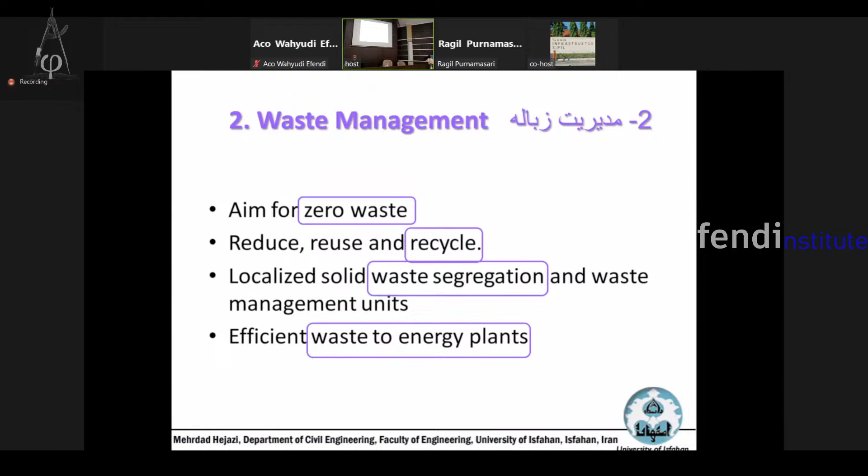Also, in a smart city, you have a smart transportation system, such as battery operated cars, mostly not petrol, and sometimes they are solar powered, using the energy of the sun. Also, you have cycle tracks, meaning most people use bicycles. Here in Indonesia, many people, as I noticed, use motorcycles, which is good. The next step would be to use battery motorcycles. If you come to Iran, unfortunately, the use of motorcycles is not that much, everybody uses cars, and it's not good at all. If you change it to motorcycle and bicycle use, that would be the best solution.

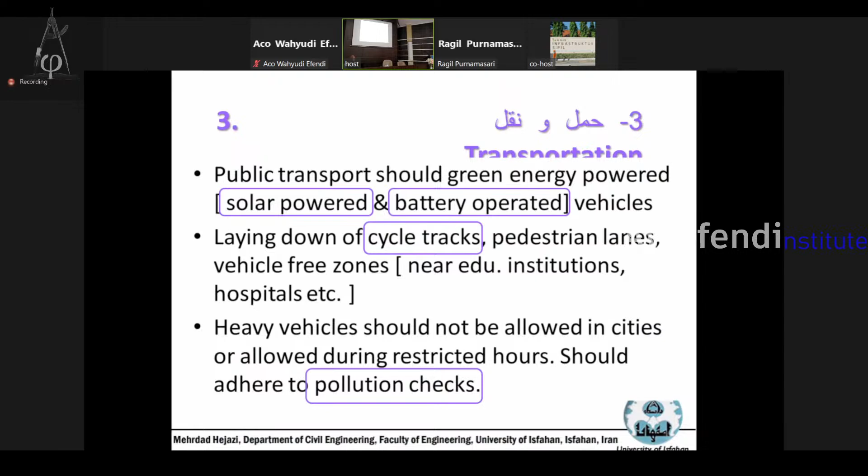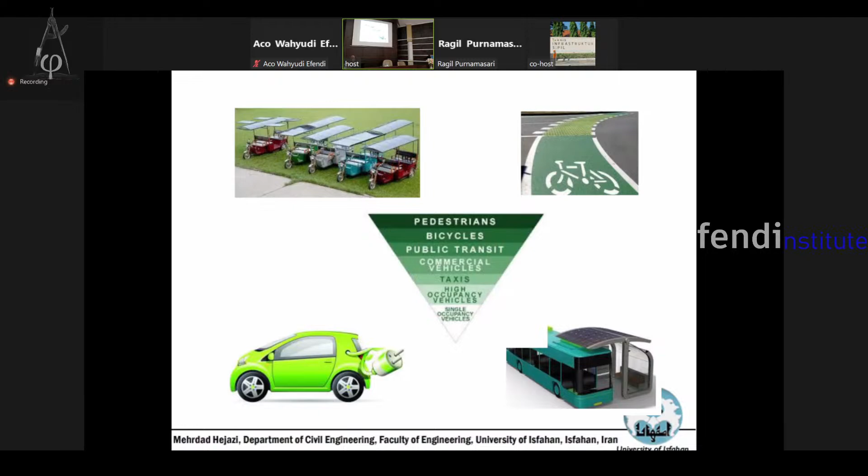In some countries, this triangle is the other way around, which is the worst situation. This is the best situation, that in some European countries, and even in Asia in some countries, you see such a triangle, which is very good.

The other is water management. Water management is important in two types of countries: first, countries with lots of rain, like Indonesia, and countries without much rain, such as Iran. Here, rainwater is very important, even if you have lots of water or little water. The water comes from the sky, and we should use it. Why not keep it?

The other thing is proper waste water treatment. It means if we go to the bathroom, this water could be recycled again and be used. In many countries, in many cities, you have two different water piping systems: one for drinking water, and the other for ordinary use of water. I don't know, in Surabaya, do you have one system or two systems? Two systems, which is very good. But if you come to Isfahan, my city in Iran, we have one system. But if you have two systems, it's a better solution.

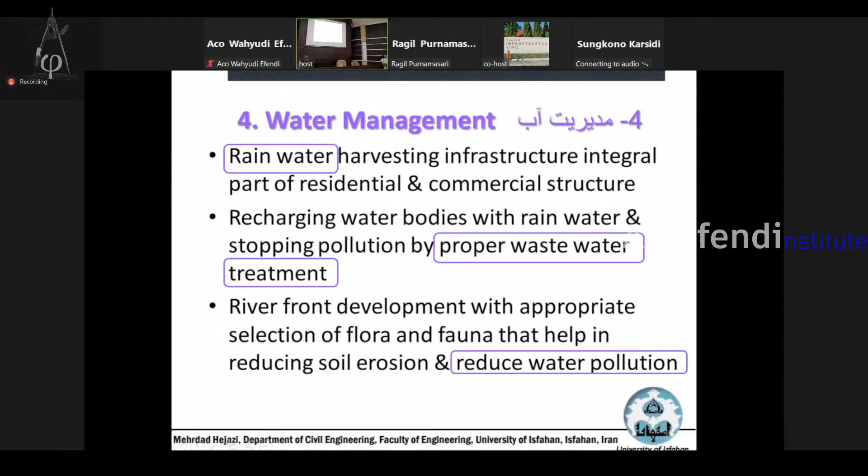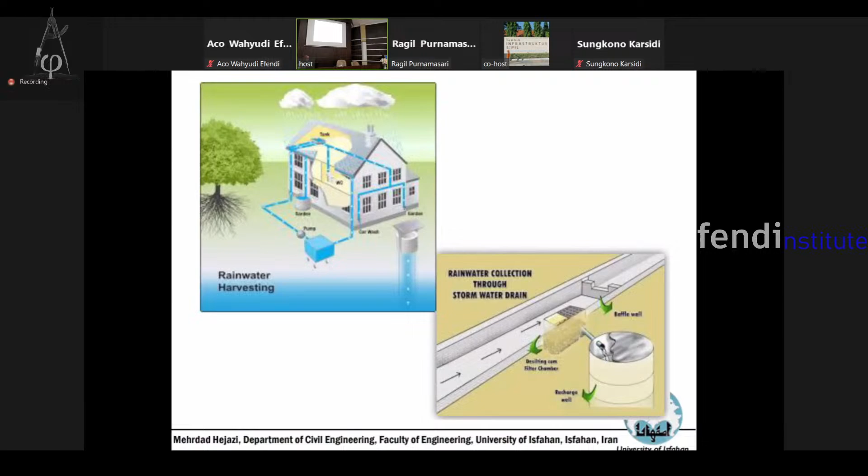Well, as you can see here, if you know this, it may be better than me. If there is rain, you can design your building in such a way that it gathers rainwater. It goes down into a tank, and it could be purified as drinking water, because rain is very good. You can drink it if you purify it quickly, and also you can use it as waste water. This is the system. And if you have so many of these buildings in a country with rain, like here in Indonesia, I think that would be one of the best solutions to keep water, and that's it.

Then we have air quality management. I don't know, do you have air pollution in Surabaya, despite the fact that you have lots of rain?

But imagine if you come to my country, where there is no rain and lots of pollution. In Isfahan, I remember when I was at your age, about 20 or 22 years old, the sky was always blue, there was no pollution, we didn't know what air pollution was. Believe me, the first time I saw air pollution was about 30 years ago. I was on top of a building in the square in Isfahan, and I couldn't see the other side of the square. I didn't know what it was, and they told me it was air pollution. Unfortunately, today, if you come to my city, to Isfahan, most of the days it's a polluted day.

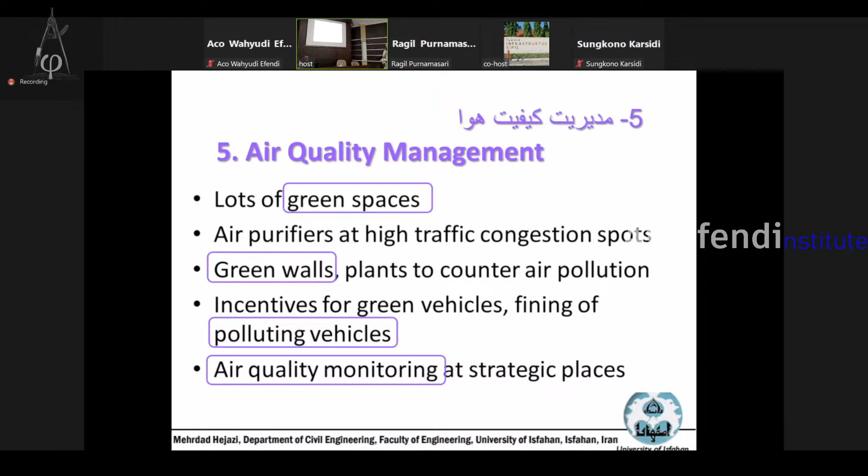You should wait for 1 month to 3 months maybe to have good air quality. Imagine we do not have rain, we just wait for winds to come, and it's only for 1 or 2 days. Therefore, you need to increase green spaces. You need to have green walls, green roofs, and you should have air quality monitoring. I'm sure you have such a system, but maybe we need to increase them.

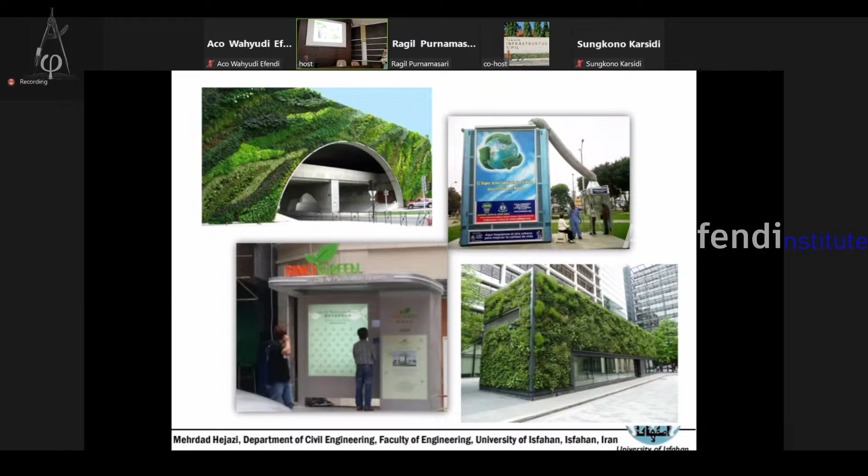Therefore, one good solution is to have such green buildings with green roofs and so on. And then security or safety for the people. You add CCTV cameras, you have a neighborhood watch program, and you have volunteer work that coordinates with law enforcement people.

Well, let's go to a smart city and see what are the materials in a smart city, because construction materials are also very important. I give you some examples. You could have roads whose pavement is made of waste plastic and waste materials. It means that you don't need to use asphalt, you don't need to use oil in order to make your pavement. If you use waste material, that would be a very good solution to the problem.

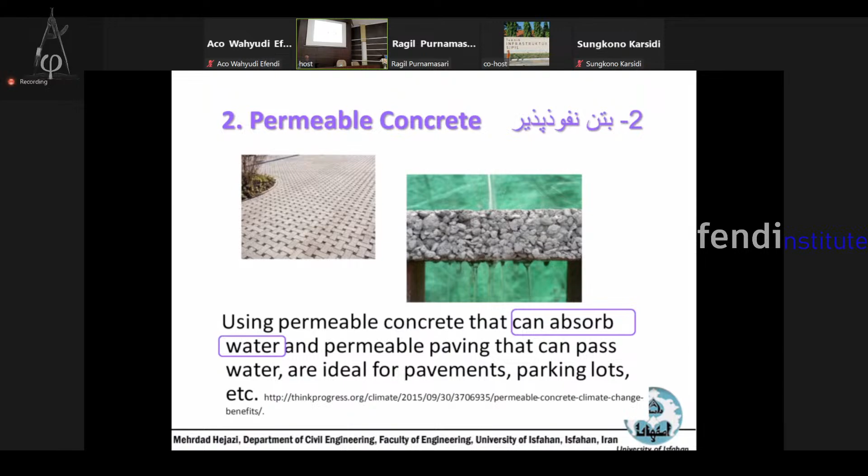Also here, it is permeable concrete. It means that when it is raining here on the ground, the water goes down in a specific location, such as a canal, a diverting canal, and then it conveys water into a tank to keep it. Therefore, in some countries with lots of rain, one of the best ways is to make permeable concrete or permeable pavement in order to absorb and keep water and use it later on.

Therefore, if I want to conclude or collect what I said, in a smart city everything is smart. Each single building is smart, as I explained, and I will explain later. The streets are smart, the parkings are smart. They are interconnected by a wireless system, and somebody in the municipality building or buildings monitors everything in order to make sure that everything is working. And imagine if you have such smart cities, you can save lots of energy. And when you save energy, you use less energy, there is less pollution, less hectic situations for the people, and people can live more easily and without any stress.

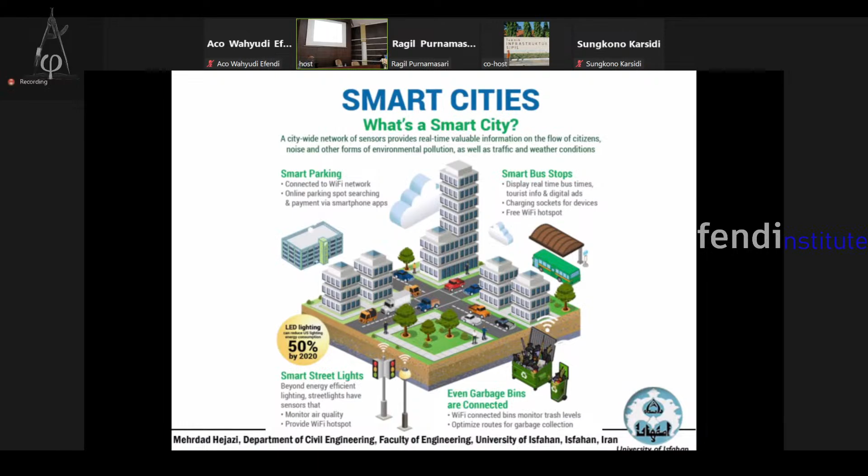Yes, please. Thank you. Now we go to the next section, which is smart building.

I explained about smart city, and also I explained quickly about smart building. Any of the students would like to tell me what are the features of a smart building? I will help you. Who is interested to tell what is a smart building?

Ada yang mau menjawab bagaimana karakteristik smart building menurut teman-teman di sini? Nggak apa-apa kalau nggak yakin, nggak apa-apa dijawab aja. I help you. Don't worry, who would like to contribute? It doesn't matter if it is correct or not. Please, yes, yeah, please.

Yeah, my name is Bayu, and I will explain about the smart building. I think the smart building is a building that has advanced technology and has any characteristic in smart cities, such as zero waste and many more.

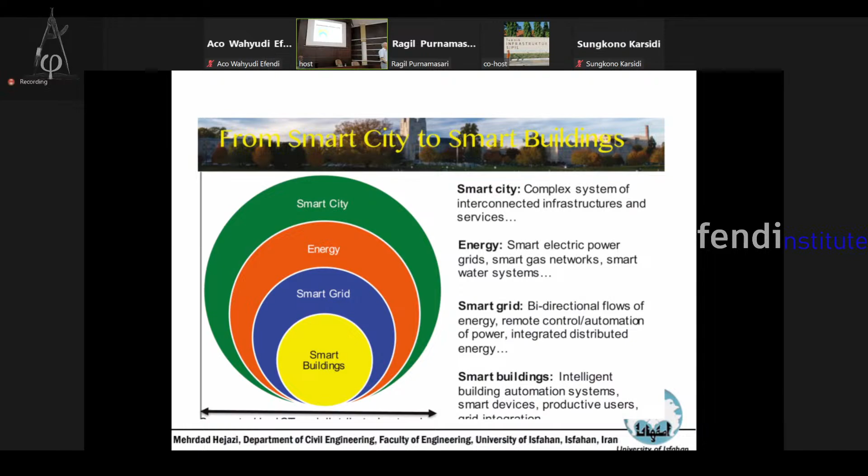Well, if you have a look at this diagram, you have individual buildings. It could be a small house, a large building, a factory, and so on. Inside each of them you have a smart system, and these smart systems are connected to each other by a smart network, which means if there is a main management department, say for example in the municipality, and if something goes wrong here, this management office is responsible to come and resolve the problem. As, for example today, if you have ordinary electricity and it runs off, there is a specific office in the municipality who should come and resolve the problem. Here, you have a smart building.

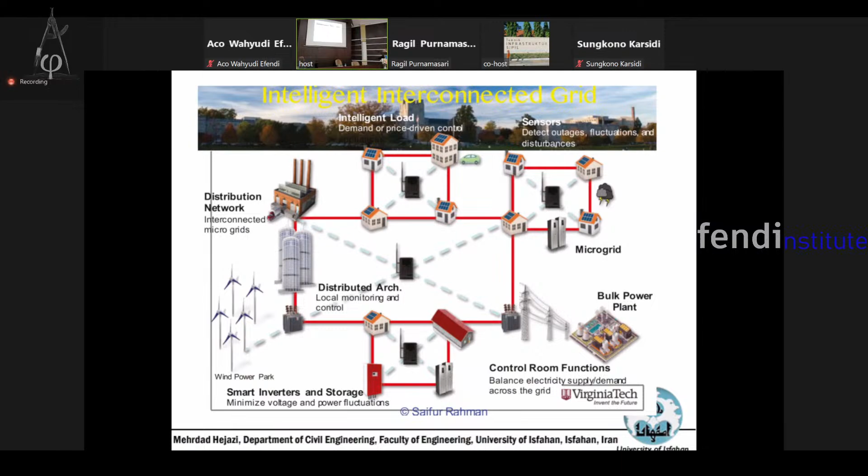They are all connected by Wi-Fi and so on, and if something goes wrong, somebody would come and resolve the problem. There are some elements like here: they are wind power parks, they produce energy. They are solar panels, they produce energy, and they should all work together. It means the whole city or elements are interconnected through a smart grid or a smart network.

Now, what are the features, what are the characteristics of a smart building? First, a smart building has four main elements. The first element is the structure. The second is the systems inside. The third is the services that this system produces for us. And fourth is management, the management of the previous three elements. Therefore, in a smart building you should optimize the operation of these four elements.

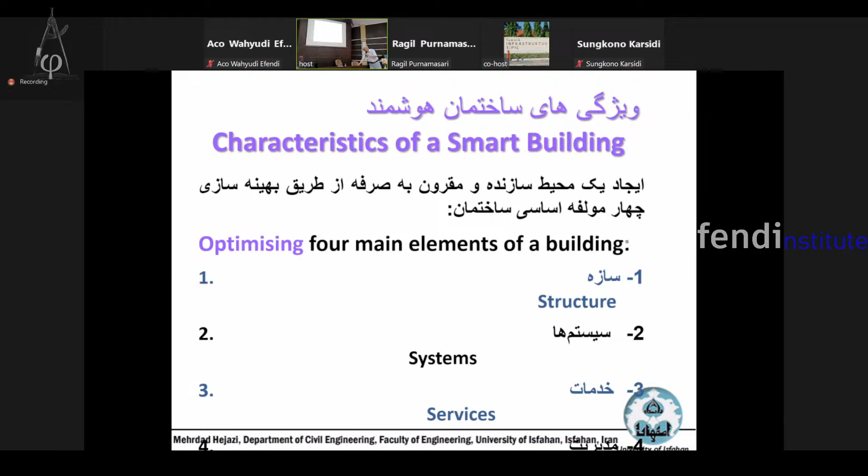It means that if we have mobile phones here, we should optimize our usage of this mobile phone. Otherwise, it is not very functional. I go, well...

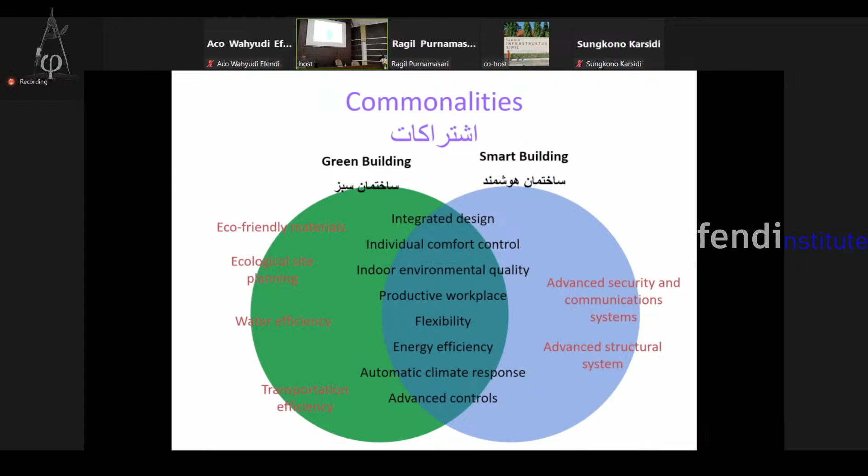It means that at the beginning, maybe you need to pay money for a smart building, but in the long term, you will have savings for your money. And it is not just a matter of money. More important is the nature, the atmosphere, the environment. Everything would benefit from this smart building.

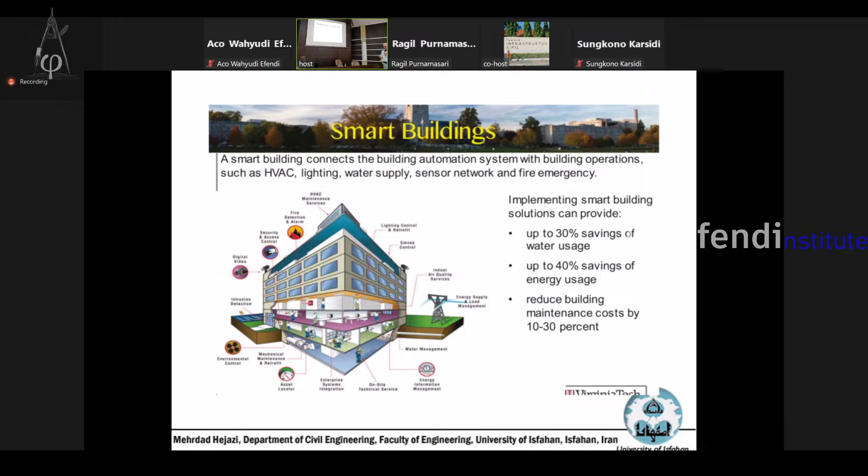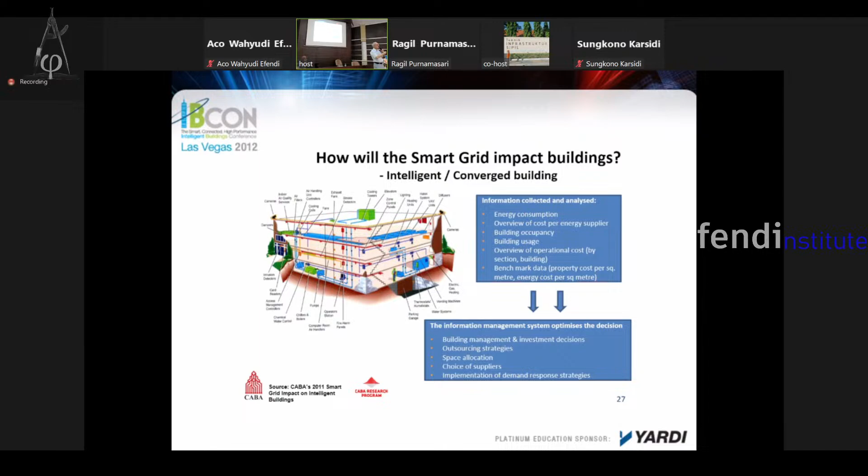If a civil engineer or a construction management engineer like you can do it, we can do it. We need to get some courses to do that. As you can see here.

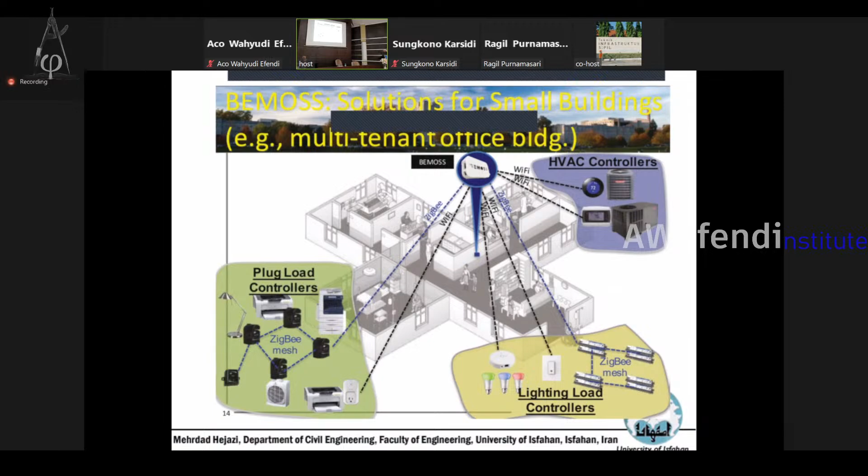Again, you have lighting load controls. For example, if lots of light is on and lots of energy is used here, automatically the main control system will check if such a huge amount of light is necessary in this building, in this room or not. If it is not, it will automatically turn down.

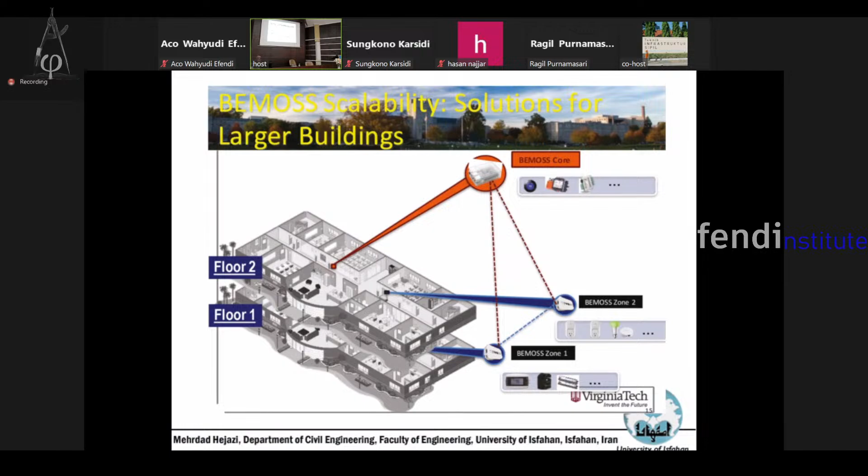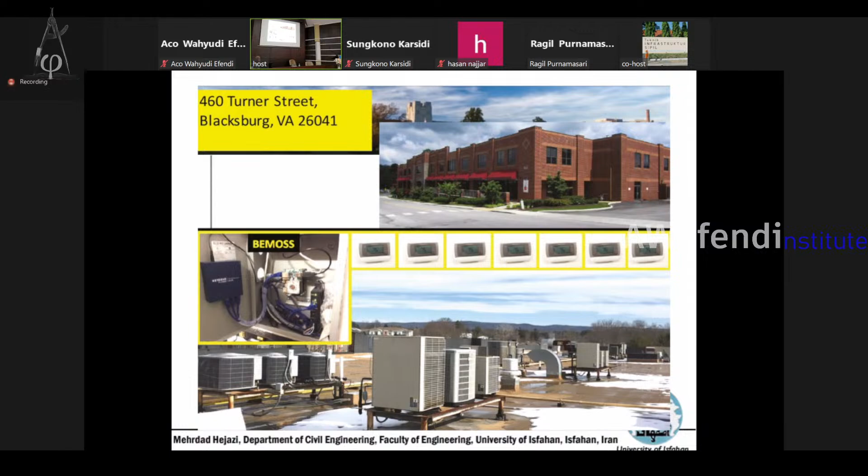Okay. Oh, let me go through. I just pass over this. Well, somebody would like to come in. Okay.

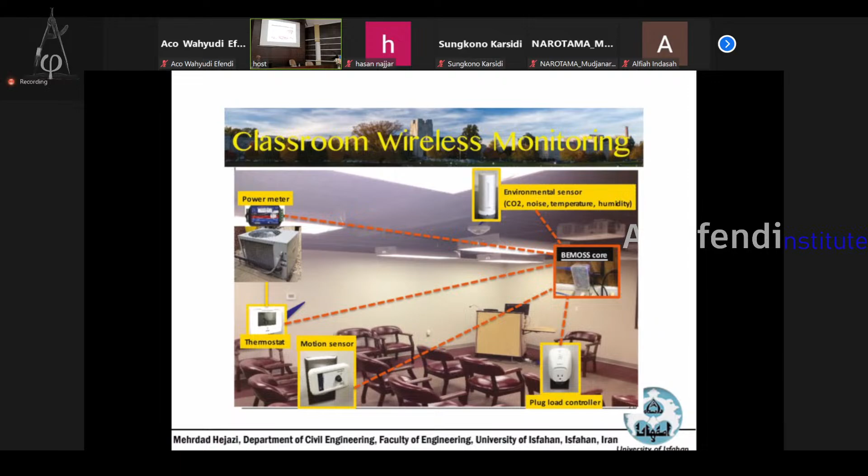Here is the system for controlling a space, a conference room like here. As you can see, there's a thermostat here in order to adjust the temperature, and also there are some sensors, and there are some noise detectors, some temperature detectors, humidity detectors, even CO2 detectors. It means that everything is monitoring at the time, and if something goes wrong, they automatically change it to its optimal function. And as you see here, there is a smart AC control.

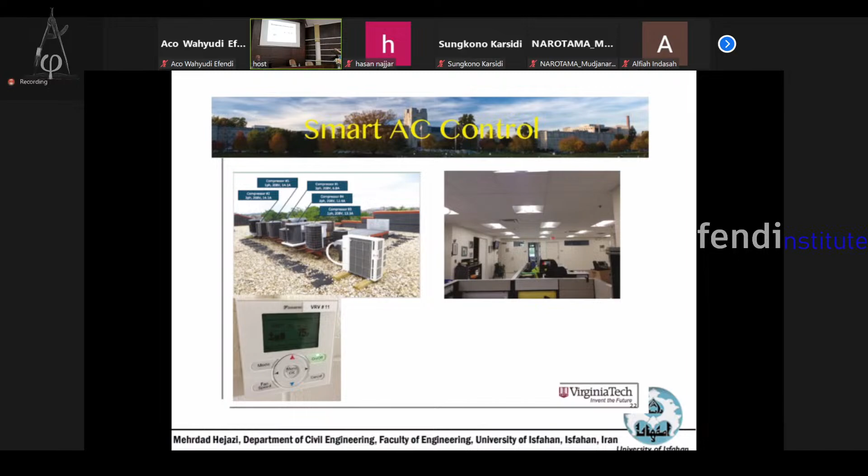It means the atmosphere, the air conditioning system is automatically controlled. It is not just a thermostat to change the temperature, but everything, CO2 and everything would be controlled and changed if necessary. Even there is a center in the building which controls the lighting. It automatically detects if somebody is not here, the lights would be turned off. And when people come in, it would be turned on.

Maybe you have such experience, but everything here is controlled. And there is a central remote control system or control room. Sometimes somebody is sitting there checking everything. Sometimes the computer itself will check everything, and if any adjustment is needed, it would do it.

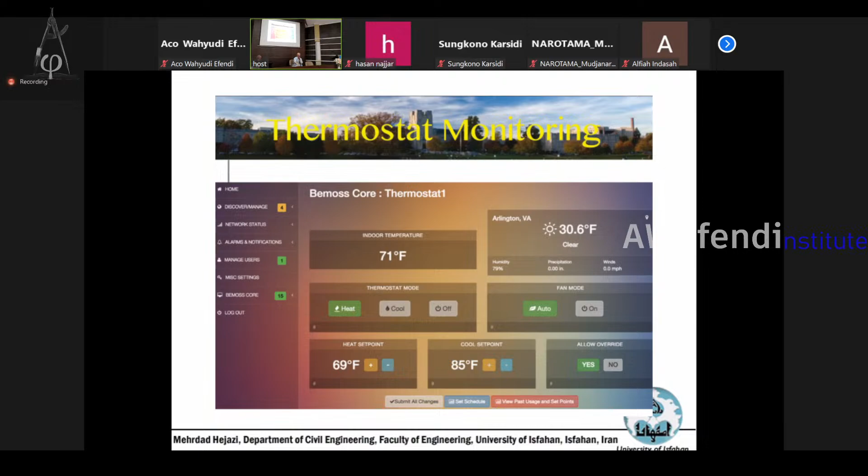Well, let's go to the next section, which is zero energy building. It's a zero energy building we call ZEB.

At the moment, suppose we have a smart building, but it doesn't mean that the energy consumption in this building is zero. Therefore, the first step is to have a smart building, and the next or final step would be how to reduce the energy consumption to zero.

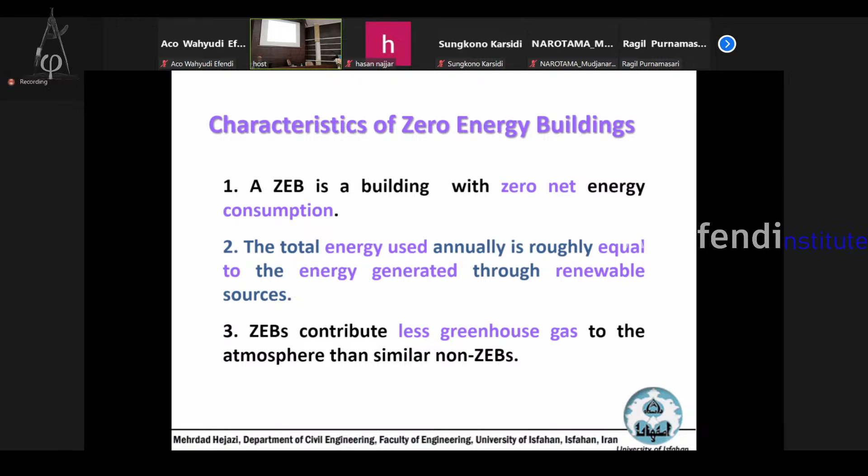Why ZEB? Why use zero energy buildings? First, to overcome the energy crisis. At the moment, in some parts of the world, there is an energy crisis; maybe they cannot produce, or they cannot buy, or something like that.

Number two, to reduce energy consumption. And number three, to protect the environment. It is the main goal, to protect the environment for future generations. We are responsible for next generations. As our parents, our old generations were responsible for us, now we should get the environment and hand it over to the next generation in a better situation. This is the responsibility that we have.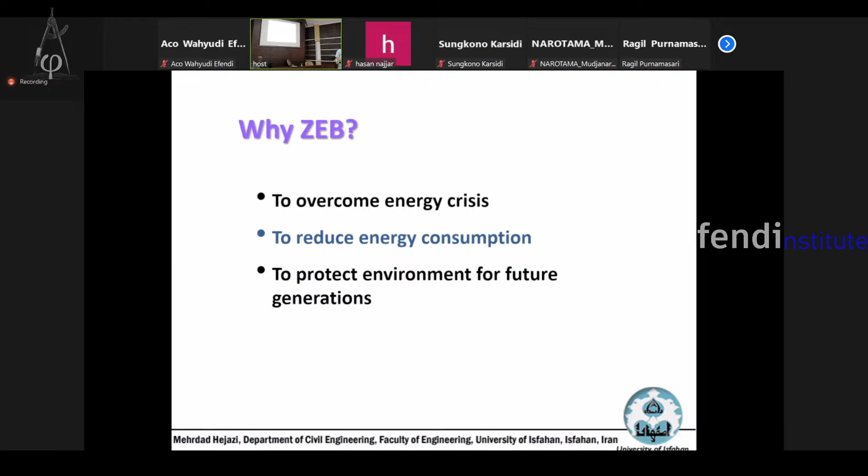How to get a zero energy building? First, we should have appropriate site selection for the building and appropriate orientation of the building. I will explain later. Number two, reduce heating, cooling, and lighting loads of the building.

Through what? Through climate responsive design. It means that we should have a climate responsive design of the instruments or devices, which we call a passive design. Now we should have a passive design of the building. I will explain in the next slide what a passive design is.

And three, to use renewable or high efficiency energy sources. It means that we shouldn't use fuels or electricity produced in plants; we should use renewable ones. I will explain this in the next slides.

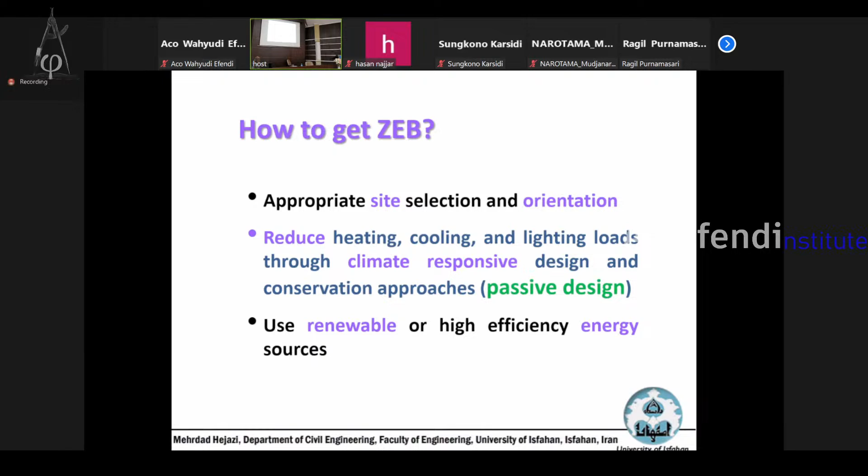Passive design is very important. Imagine we are 1,000 or 2,000 years ago. There is no energy, no electricity, no petrol, no fuel, nothing. What you have for energy is wind, sun, maybe wood you can burn, and so on.

When you have a passive design building, no auxiliary equipment is required to make the system function. It means, as you can see here, you have a cooling system here, a lighting system here, and so on. This means this building is not passive; it is not designed based on passive concepts.

It doesn't matter, everywhere in the world is the same. But we should change our concept. How? In this way: if you choose a good orientation for the building, your building could use sunshine, could use wind, and so on.

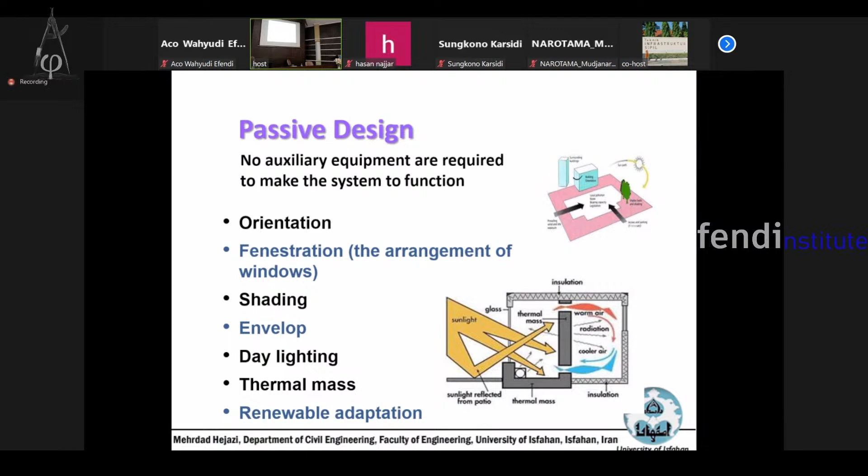You should be able to use daylighting, and also you should have a high thermal mass, I will explain later, in your building. And also every energy consumption should be adaptable; it should be adapted to renewable energy. These are the main features that a passive design should have. I will explain in the next slide.

Your building should be able to catch the sun, or sometimes be prevented from the sun. Your construction should be airtight, meaning no hot or cool air comes or goes outside or inside. You should have good thermal insulation. You should have high efficiency windows and doors, I will explain how, and you should have heat recovery and natural ventilation.

Here in this building, we don't have natural ventilation unless we open two of the doors or windows, one on this side, then we have natural ventilation. We should have solar water heating, which is very important. In order to make water hot or warm, instead of using electricity, it's better to use solar energy. And also you should have efficient air conditioning, which I will explain to you later.

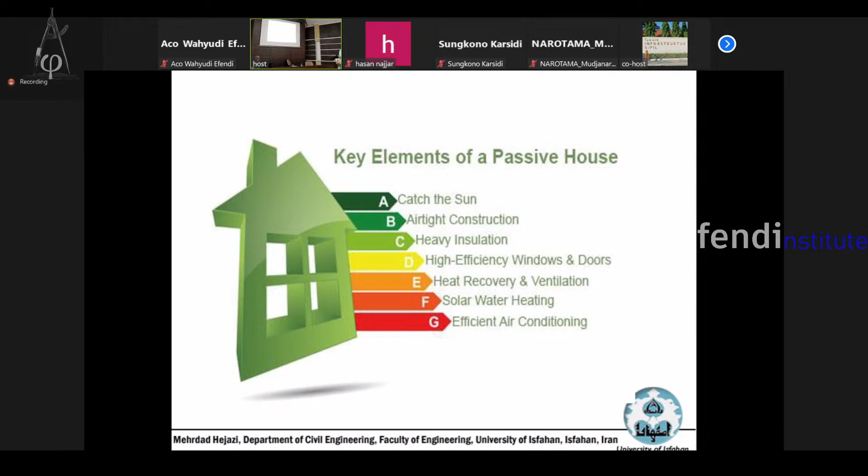Well, if you were 200 years ago, 2,000 years ago, I could give you some explanation. Maybe if we have time, I will show you some examples in different parts of the world that they made passive buildings.

But let's come to the present day, because in present day we are using modern systems, modern materials, modern buildings. There are so many examples in the world. I'll just take you into United States. It is a National Renewable Energy Laboratory, which belongs to the government, and they are working on energy usage of the buildings.

If there is an authority in your country responsible for energy, this organization itself is supposed to have an energy efficient building. For this reason, they design their own buildings in the organization as smart buildings.

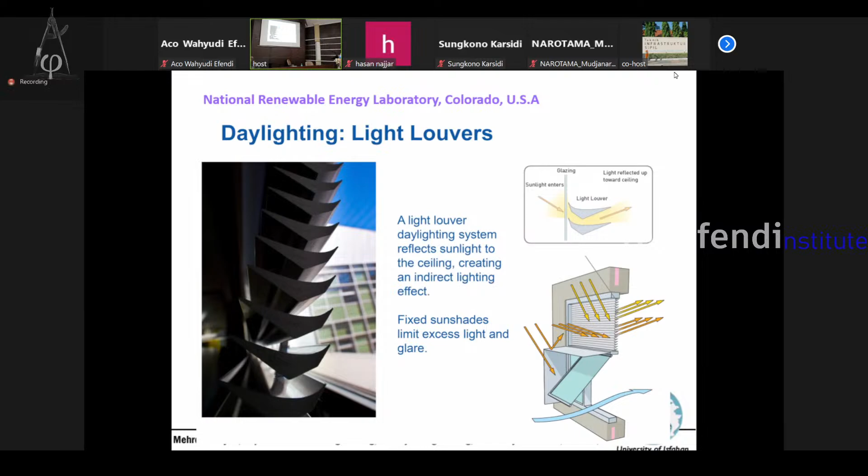Shall I continue? Good. Now, if you have a look inside, it's very bright. As you can see, the light is taken from outside, and here you don't see any artificial lamps, unless during the night. It means that here the energy consumption for lighting is minimized.

Also, here, as you see, the color of the walls is light. As here, they have used white-colored surfaces in order to reflect the light, which is very good.

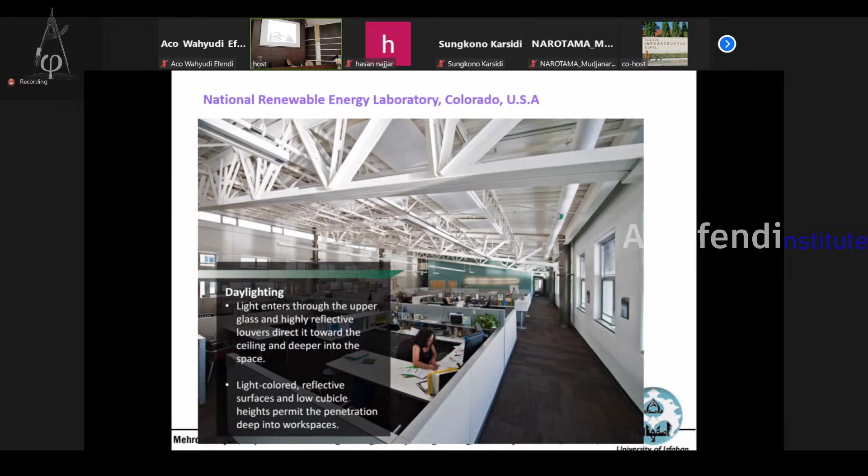Here, as you can see, they have increased thermal mass. When we say thermal mass, it means this: if you have sunshine here and sun comes to this wall, it is a very thick wall sometimes, or it has a wall material with high thermal mass. It means that when it's very warm here in the summer, say 40 degrees centigrade, and sun shines on it, it takes a few hours for the heat to come from this side to inside. And when the heat reaches here, it is already during the night, for example.

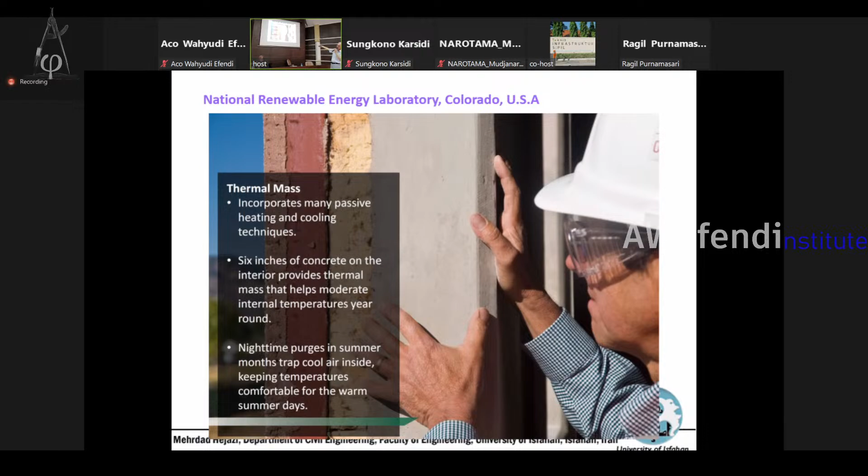And during the night, sometimes inside we need heating, and therefore the heat of the sunlight would be used here. In the opposite situation, in summertime, it may be cool outside, and that coolness is somehow protected inside. Therefore, if you build a wall or roof with high thermal mass, you could save lots of energy.

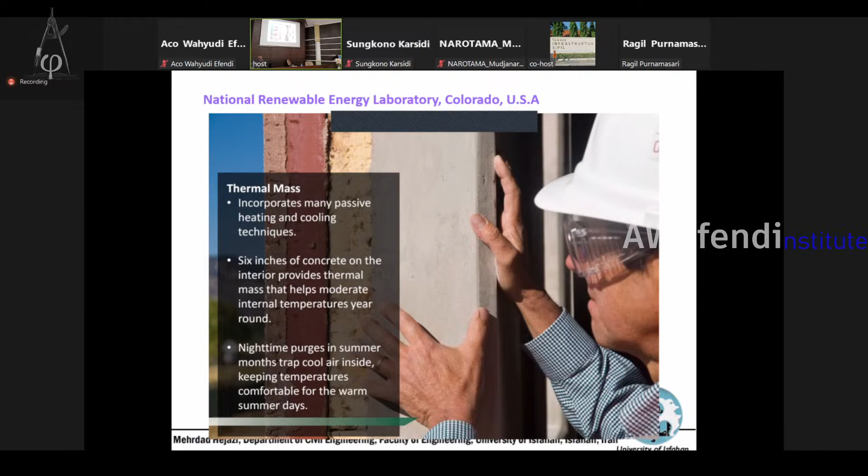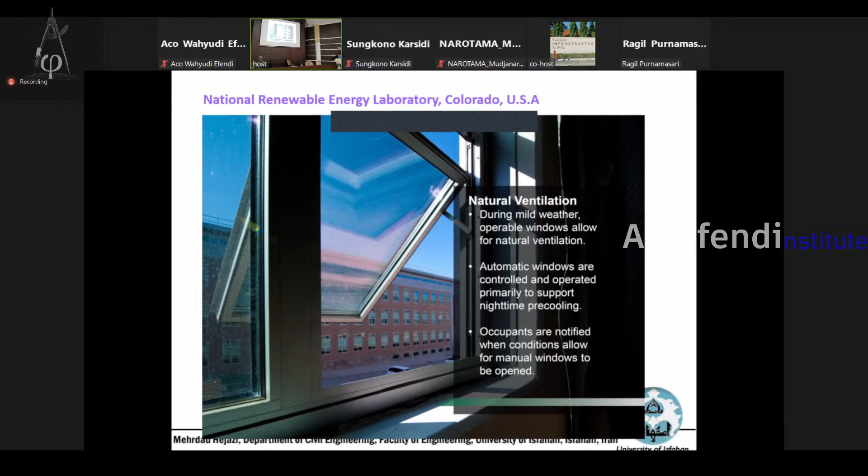Now we go to the fenestration, to the windows. They are smart windows. It means they automatically open or close, and they adjust themselves with the situation, which is the wind speed and the orientation of sunlight. Therefore, you can have natural ventilation with an automatic system.

Here they have used triple glazed windows. Here I see we have some windows with some glasses. I'm not sure, are they single glaze? I guess they are single glaze. Most of them are single glaze, but in general, if you use double glaze or triple glaze windows, that would be very well insulated against thermal transformation. Therefore, using triple, double, or two-pane glazed windows and doors is a good solution for energy saving. Again, this is the situation for the windows that I talked about before.

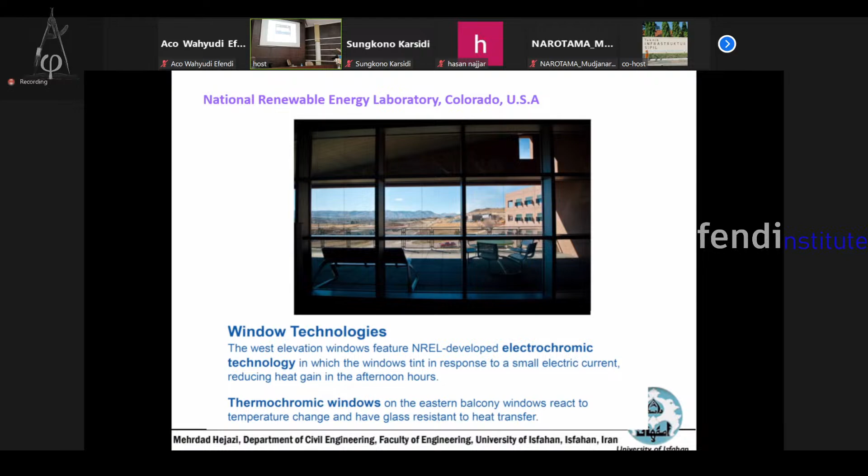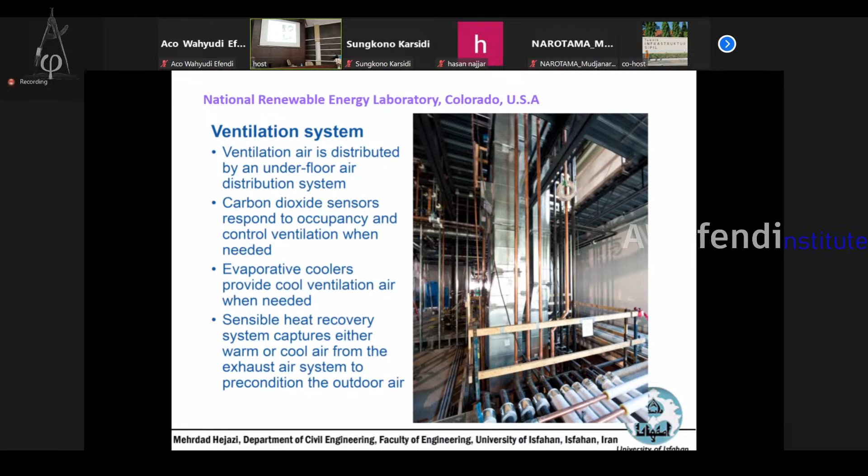It is designed by special engineers, and they try to, even here, as you can see, have carbon dioxide sensors. It means they check the CO2 in every space. If it is more than the maximum which is allowed, somehow the ventilation system starts in order to reduce the amount of CO2. And also there are sensors for thermal load, and they check the temperature in every space, and if something goes wrong or it's not in the comfort limit, they will change it.

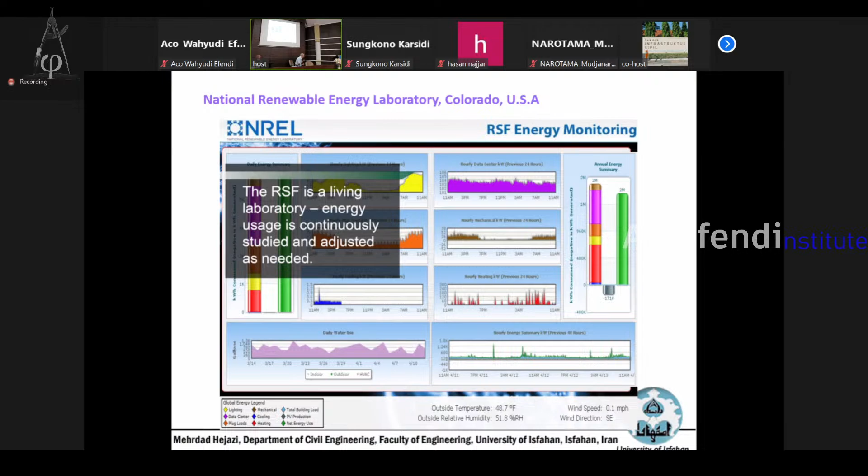Okay, thank you. Now we go to the last part of lecture today. Let's go to some case studies.

In the Nordic countries, they have been very successful in developing strategies for smart buildings and smart cities. I will give you some examples.

First, we go to Sweden. In Sweden, there are so many cities. There's a town called Borås. This is the reference that I have used, the name of the reference is here. If you like, you can go and read the paper.

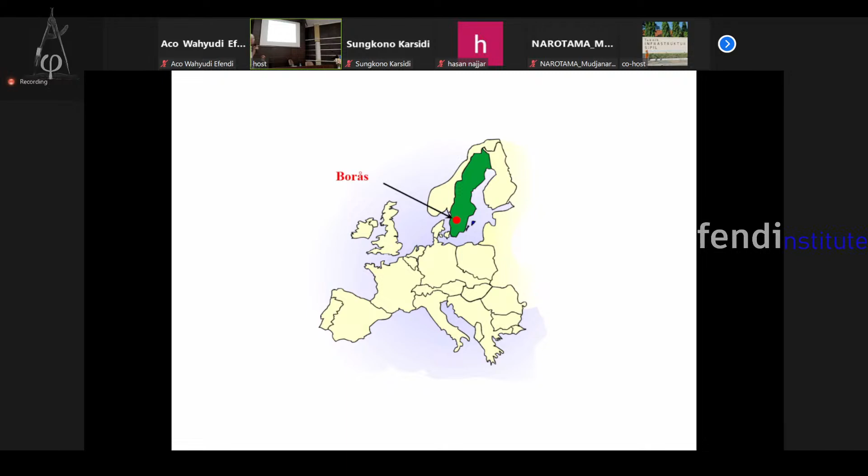If you have a look here, it is the waste management system. First, there is waste generation by the people. Then we have waste handling, separation, storage, and then processing.

It means that maybe more than 90% of the waste would be recycled. Usually we have from 5 to 20% that we cannot recycle, but in general, more than 80% is recycled. As you can see here, it is the consumption or waste generation.

Some part is reused. For example, if there's a plastic bag or paper bag, we can directly use it again. Some are recycled, as here. Some are used for energy, meaning energy recovery. About 5 to 20% that we cannot reuse or recycle would go to the landfill. Therefore, this is a target. If we get up to or around 80% recycling or reuse, that would be a good achievement.

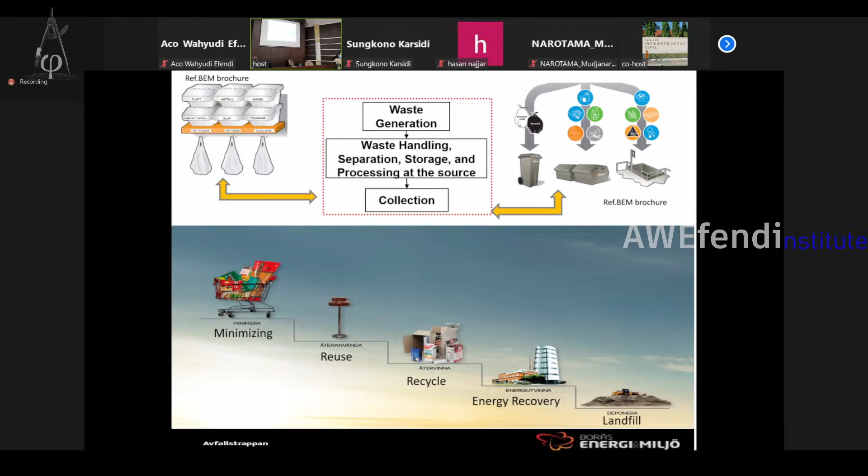Again, here in this city, what they do for a smart building is management of heating, management of cooling, using biogas, using hydropower, also waste management. They would do it as I explained here.

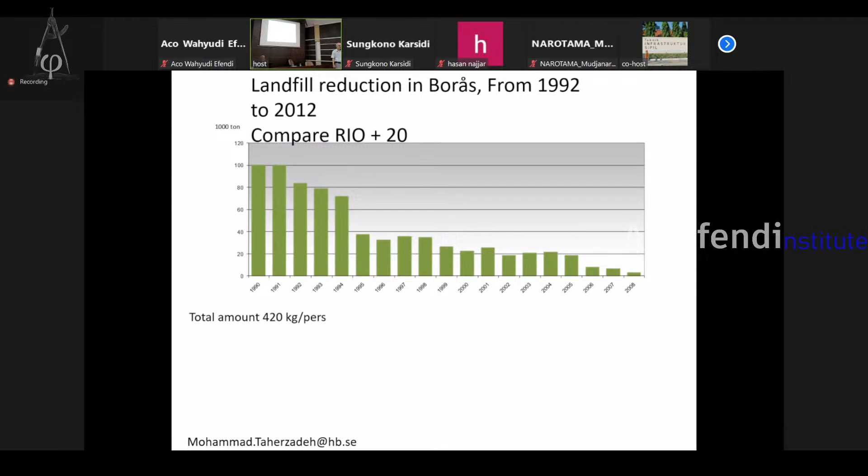And here today, we are in 2023. Probably this has been reduced. As you can see, during 20 years, they have been able to reduce the amount of waste which is not recyclable nearly to zero in the city, which is a very good achievement. But as you can see, it took them 20 years. It means if today we start, say, in this city, maybe in 10 or 15 years we can do it. Maybe more if the city is large.

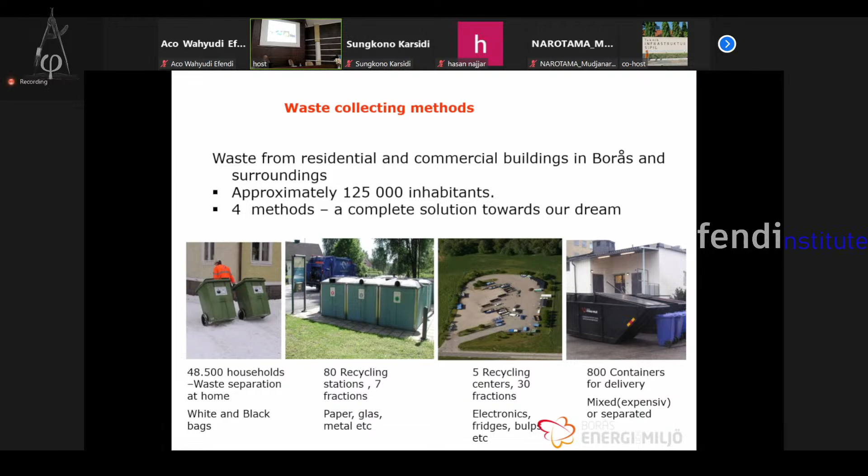Let me go to the waste collecting methods. As you can see, even here, this sort of separation is very common at the moment. But 20 years ago, not so many cities had such a simple separation. Okay, but today everywhere you go, it is, and we can use it. Still in some cities, we don't have such a system.

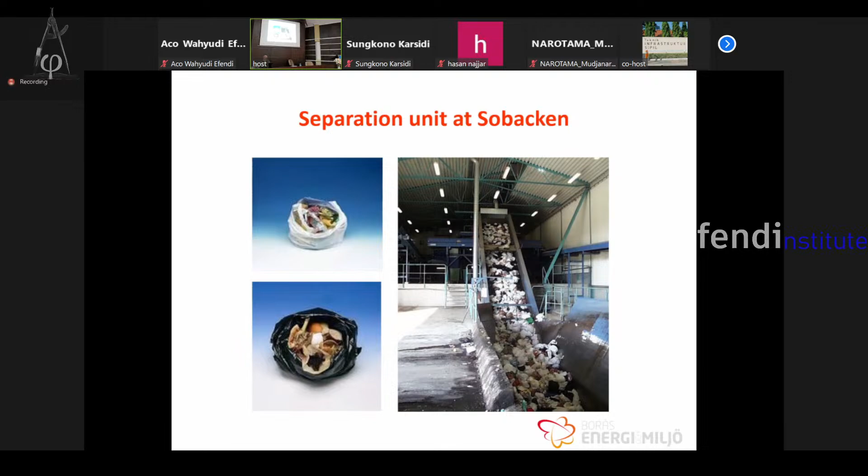This is the separation unit at the plant that we have. Such a separation system was not very common, but right now many cities have it. But remember, 20 years ago they didn't have that.

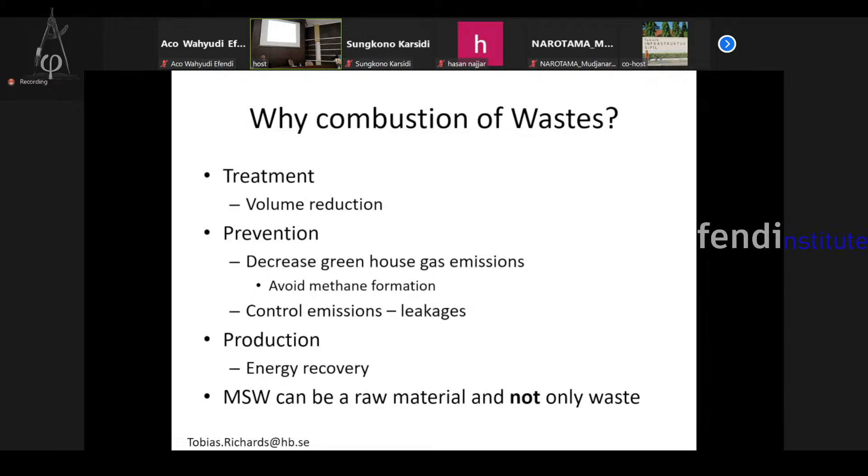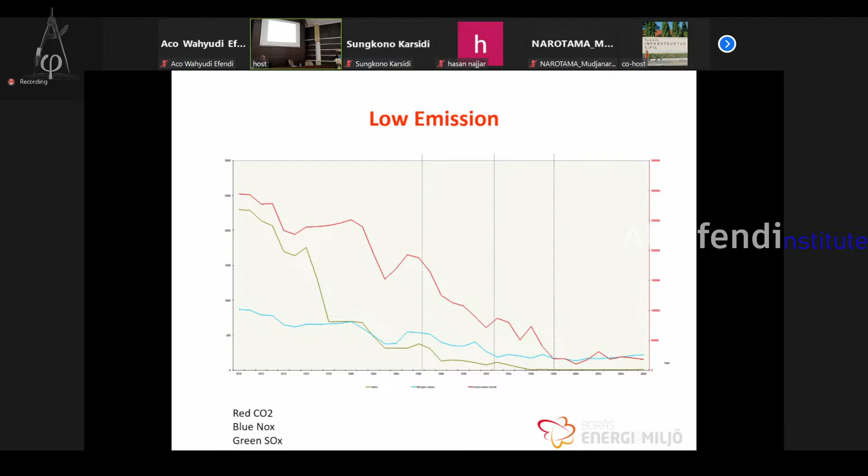Let me go. This is the combustion of wastes. I'm not going to explain it. And this is the emission. When you consume or combust the waste, you send CO2 into the nature. As you can see, there has been a big amount of emission 20 years ago, but you can see it is reduced. It means that greenhouse gas is reduced by more than 90% in that city.

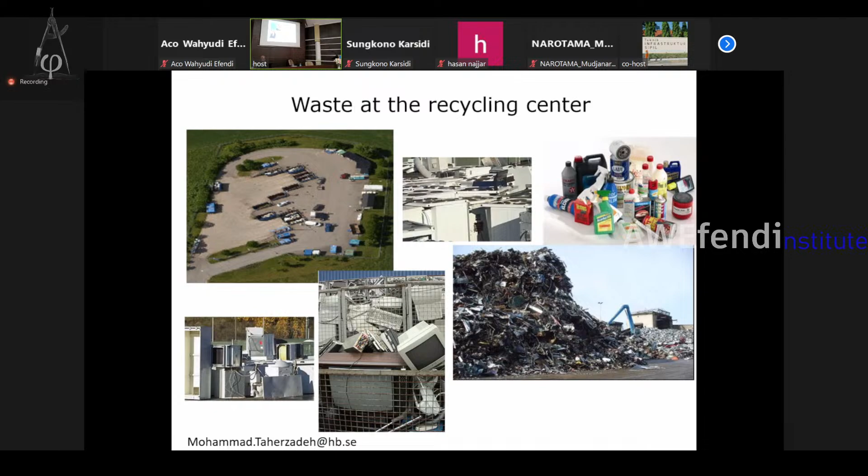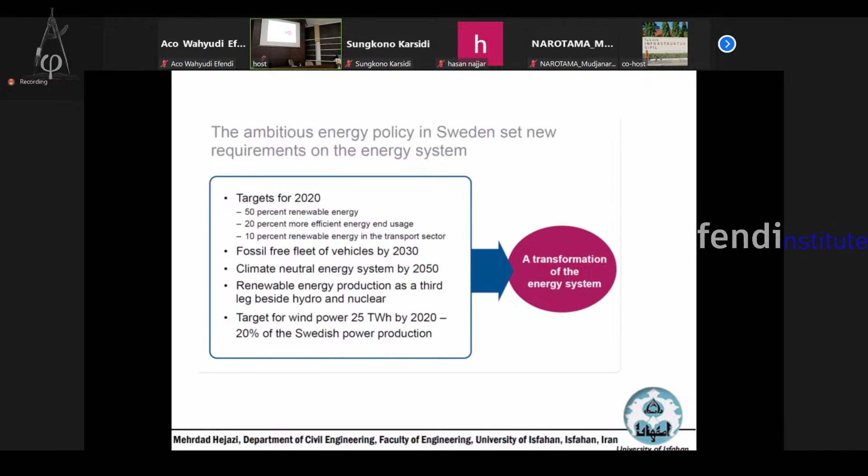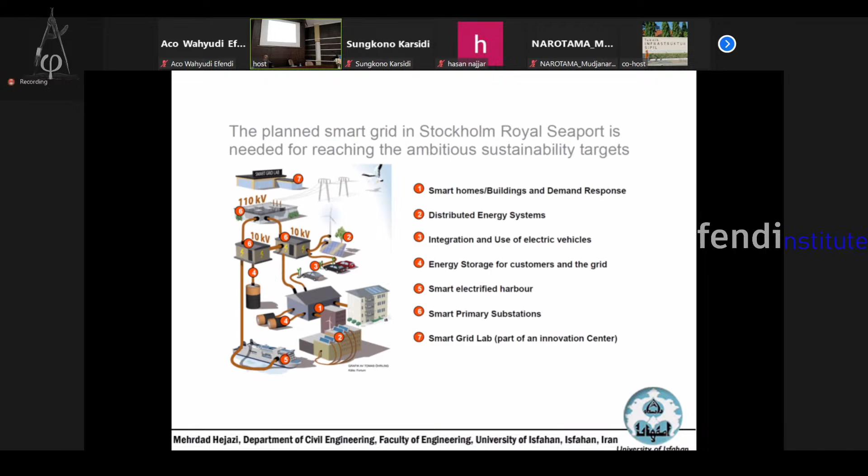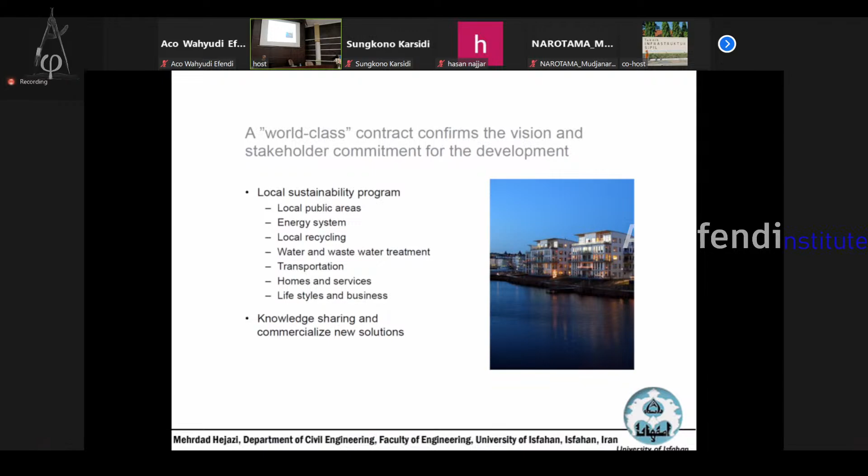The main objective are these elements that we see. If you work on all of this, maybe in 10 or 20 years, you can get a good and smart city. Now we go to Finland.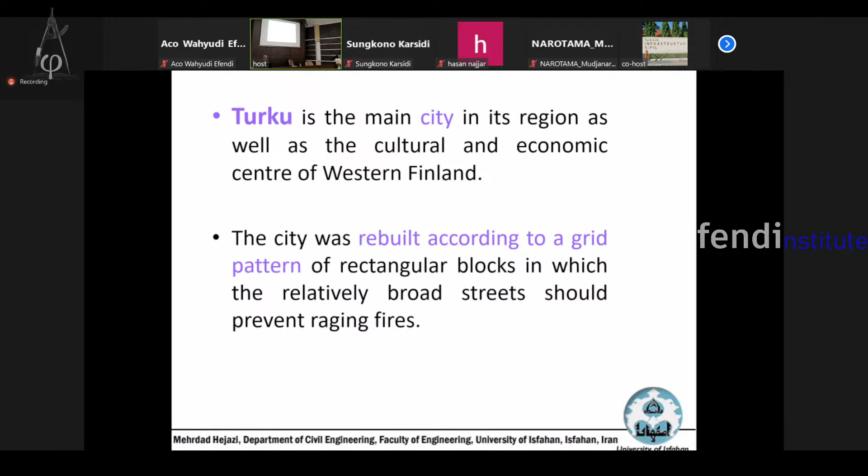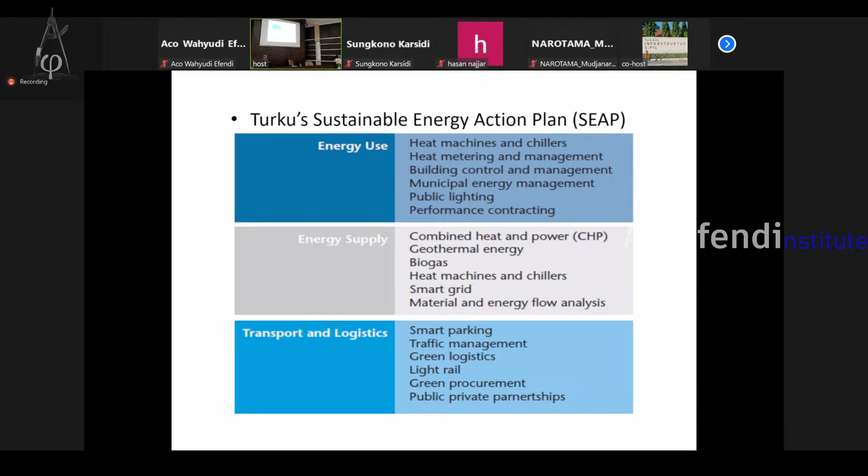In order to have a sustainable energy plan or program, the strategy focused on three main objects. First, the type of energy usage. They evaluated the usage of energy, energy supply, and also transportation and logistics, and their use was somehow focused on making an energy efficient street.

As you can see here, they had a program for traffic management. They were encouraged to use bicycles or to use some applications in order to find the nearest and best parking for the drivers.

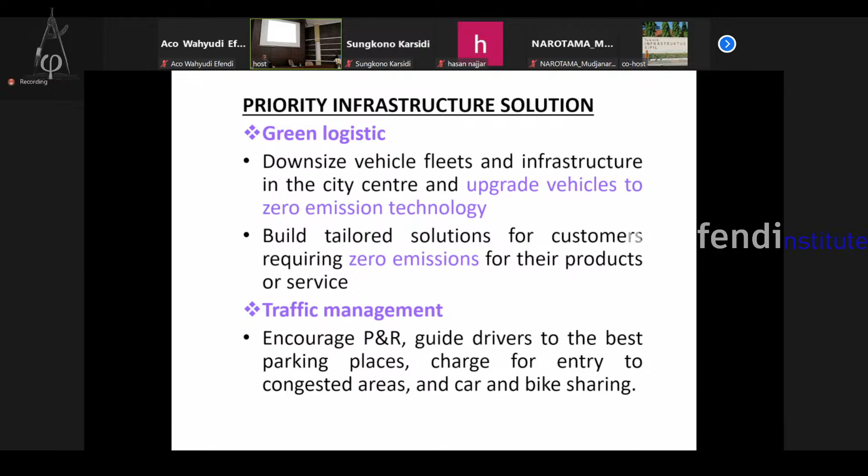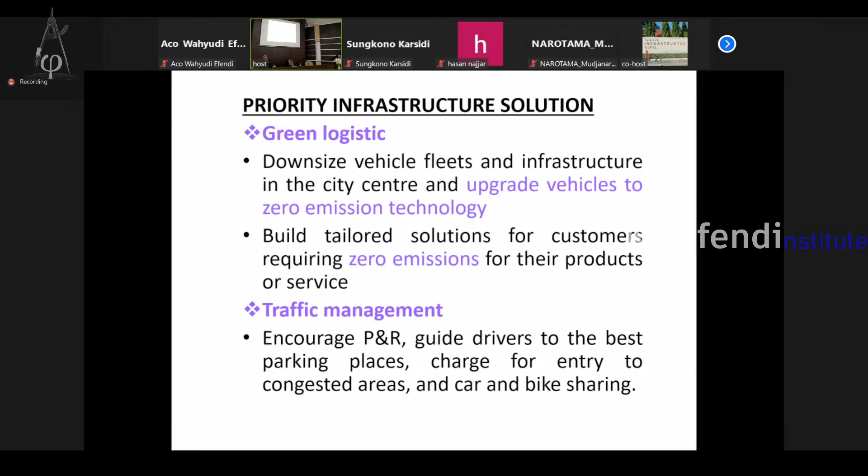Also, the vehicles, the cars were designed in order to have zero emission technology. For example, they were encouraged to use battery or electric cars. Also, they produce biogas by waste materials instead of using natural gas in order to reduce the emission.

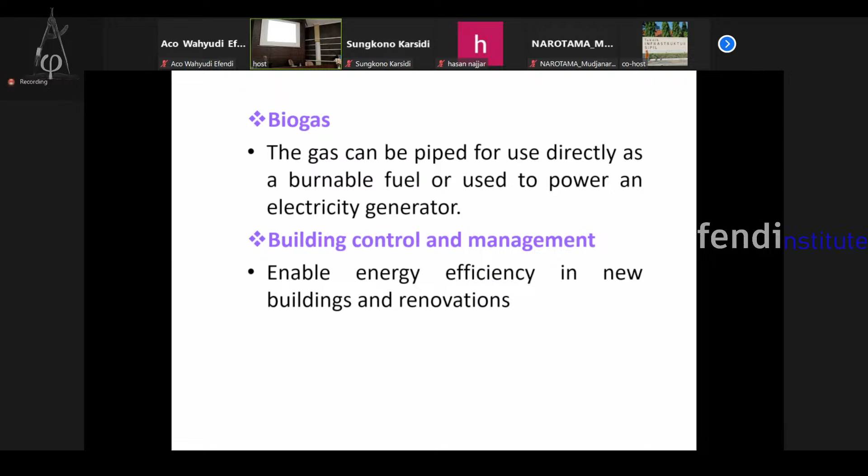And also, they focus on building smart buildings. As you can see here, they try to go for buildings which could be controllable and could be managed by some energy efficient devices and so on.

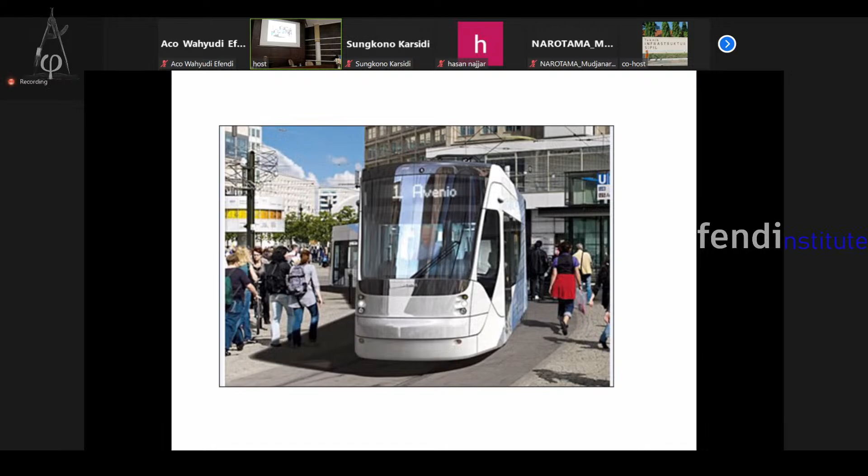Now we go to the city. As you say, these vehicles are mostly electric. They are using electricity, and electricity is produced by biogas mostly, or by sunshine, or by wind.

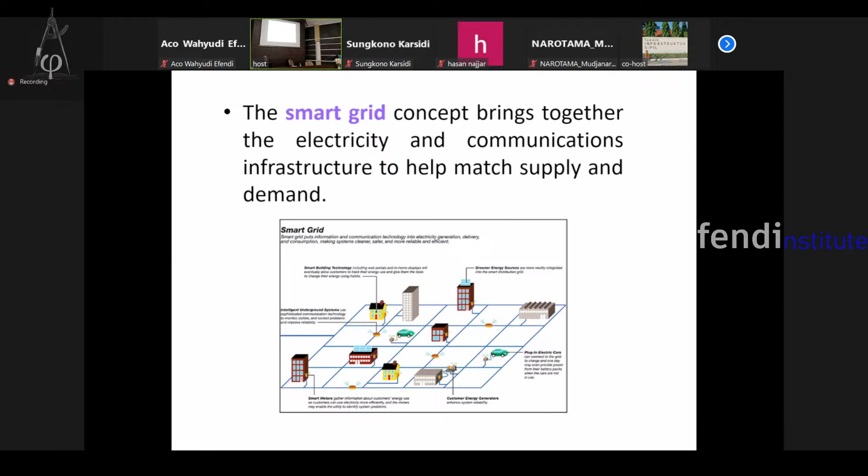Here you have a smart grid in the city. Every single building is a smart building, and the operational function is somehow controlled by the municipality in order to optimize their usage and energy consumption. Also, they try to use the heat stored in the soil for heating the building and so on.

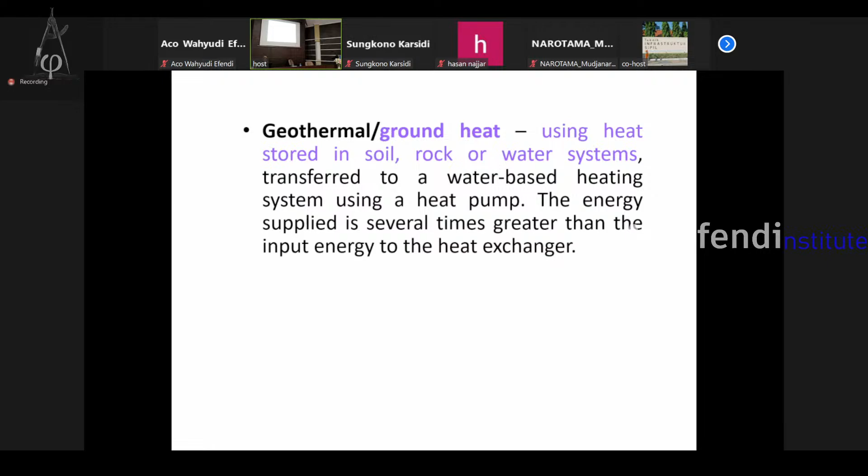Also, as you can see here, there are some smart parking, which means that when there is not enough space for the cars, in order just to find the car, they can automatically connect, the empty place in a parking is announced to the driver, and he can use the empty parking.

As you can see here, there have been some successful practices in Europe and out of Europe, and I think everybody in the world can reach such a goal if we have a good management to do that. Okay, thank you.

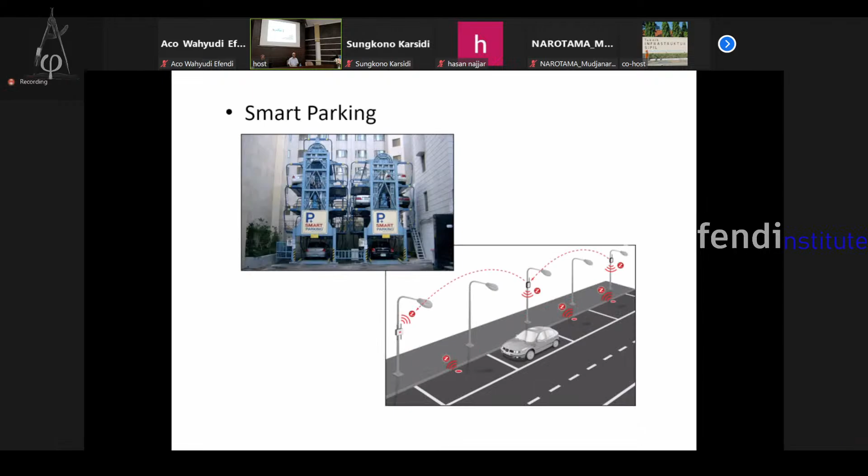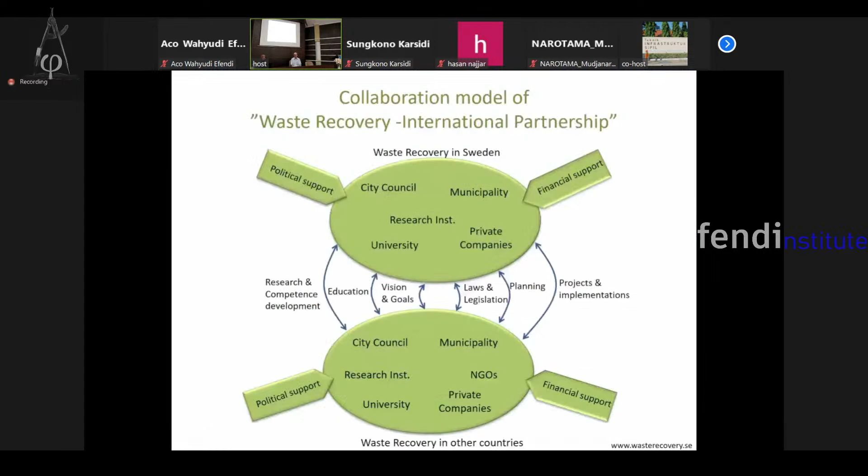So we've been discussed about the smart cities, the characteristic, the material, the smart building, and zero energy building. And the last things that he shares with us is the case study of Scandinavian and Stockholm, Borås and Finland, which give us a new perspective that the smart city is possible to achieve, even though it took a long way. The Boras city, as shown, started in 1959, but it happened, they achieved the smart city thing. So it's possible for us to do the smart city by a single step from now, maybe.

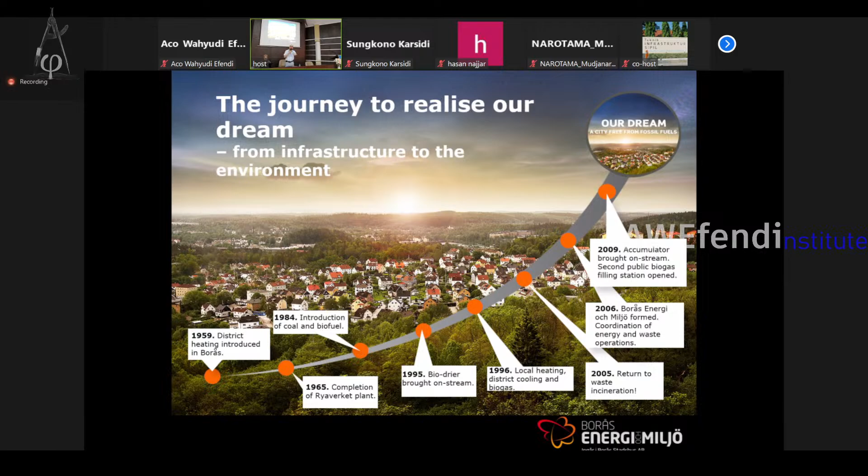Second question about ordinary people, how to change their attitude. As I said, they need education. Education needs to start from school. Some courses should be added in the school classes, and then that would be for the next generation. For example, your children. And it takes about 20 to 30 years. Those children who will sit here, they will know how to do that. But for the present situation, I think the young generation who can understand it - you are now construction management engineers, okay? You should ask your clients who want to construct, and educate them that it is important, and you should do that.

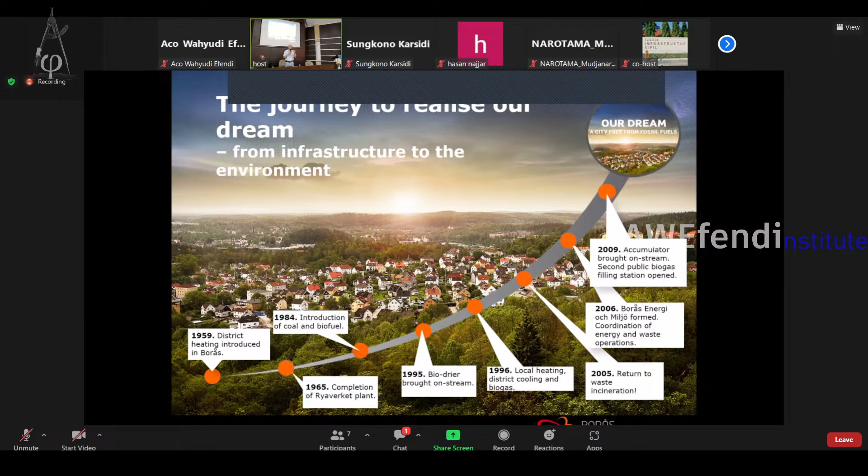Also, government has the responsibility to train people, whether through television or in schools. The government should subsidize and should make some punishment for some people. By global management from the government and also local authorities in every city, it is possible to change the attitude in 10 or 20 years. I think it is possible.

Thank you, Professor. Okay, thank you for the question. Since we have limited time, let me jump into the conclusion. We are trying to create the smart city, which is a long way to go. It will keep us protecting our future generation and our environment for our future generation. So as engineers, we can start by creating the passive design that Professor Hijazi has explained to us.

Because today is the last day I meet you, it was my pleasure during these 3 days to be with you. Very intelligent students. Most of you understand English and can speak English. It's a very good priority.

I thank you very much again for your hospitality, and your Professor Dr. Yusuf, and also you. I thank you very much. You can be in contact with me, you have my email address. Inshallah, we are going to make an agreement between our two universities, your university and my university in Iran. Whenever you decide to have a visit from Iran as a student or non-student, you can apply to my university through your professors, and we will try to host you in Iran as much as we can. It was my pleasure to be here for 3 days, and I hope to see you again in future, maybe in Iran or again maybe here. Thank you very much.